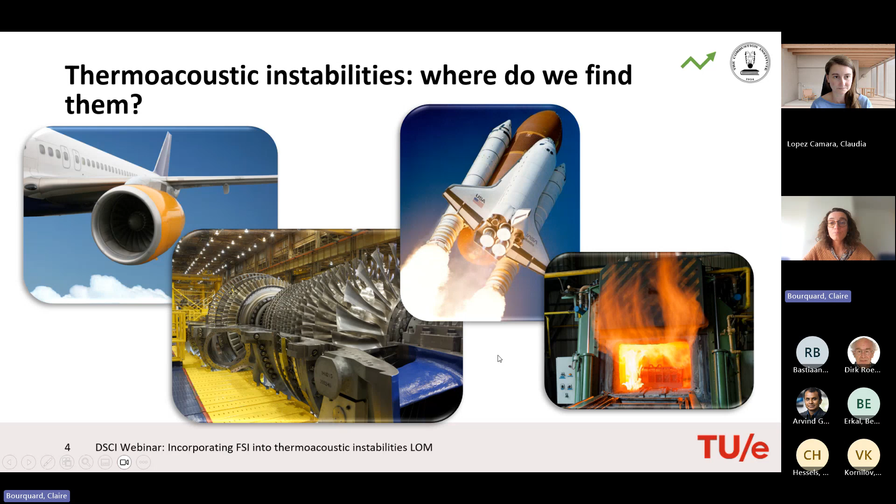So what are they? As a simplified explanation of what happens in a combustor where you have thermoacoustic instability: you've got a coupling between an acoustic mode of your system, typically between the fuel and air injection, where you would have choked conditions, which act as a hard acoustic boundary condition. Then within the whole volume of your combustion chamber, you can have acoustic modes that are the eigenmodes of your combustion chamber. And then in some cases it happens that the flame, specifically the heat release rate of the flame, is synchronized to the acoustics.

And this is measured by the Rayleigh criterion. It's a criterion where you integrate over one period of your typical acoustic quantity the unsteady pressure and the unsteady heat release rate. And of course, if the integration over one period of this quantity is positive, this means you have energy added to the system, and this is when you can reach instability. So the amplitude would keep growing and growing until some nonlinear mechanism makes it reach a limit cycle.

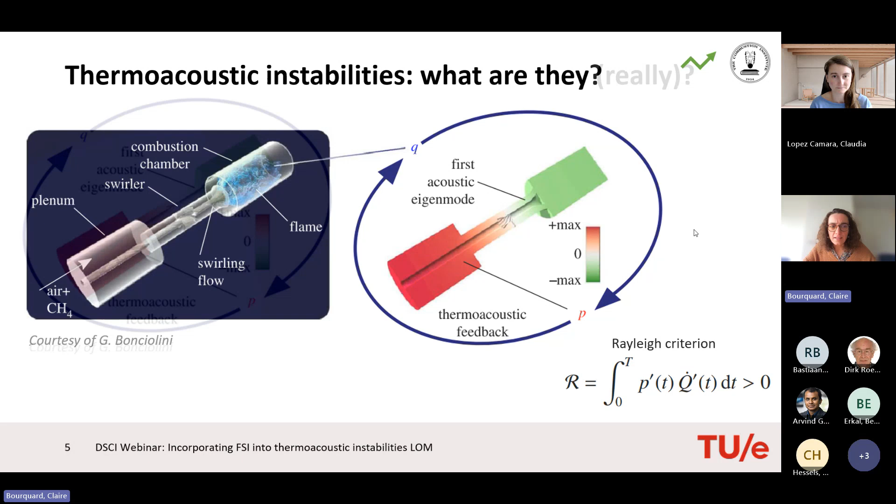But we're going to go a bit more into that. Okay, so this is a very simplistic view—you just have the acoustic eigenmode and the flame. We're not going to go deeper into the modeling today, but I just want to make you aware that there are models that take a lot more physics into account. I think usually it's quite scary to show this graph from Wolfgang Polifke in Munich, which shows you basically everything that can come into play when you're looking at thermoacoustic instability.

So we're doing a very much simplified version today. But as you can see, you could also take into account entropy waves, some coherent flow structures, some coherent flame structures as well. So there's a lot more to it, but I'm just focusing on a very simple modeling—just so that you are aware this is a much more complicated problem.

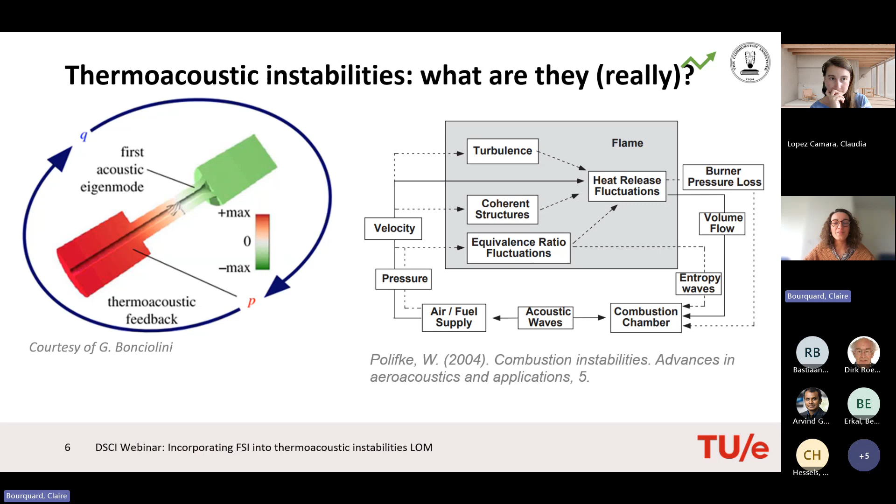Okay, so what are the consequences? When you have thermoacoustic instability, your amplitude typically can rise very high. This depends on the conditions of your combustor, typically the equivalence ratio and the fuel mass.

This is an example from a colleague of mine from the PhD, where you can see that on this equivalence ratio versus natural gas mass flow map, you have some places where the RMS pressure measured by some microphones is quite low. In that case, you have no clear dominant peak in your frequency response. Of course, you still have some frequencies that dominate if you zoom in on the responses, but the amplitude of your pressure fluctuations stays close to zero, and the distribution has this shape with a very sharp slope close to zero, and then an inflection point after the peak.

In some other cases, typically when we go more lean and add more air to the system, we can reach a case where the pressure fluctuations get very high. The typical diagnostics tool to determine if you have an instability is a very clear resonance peak in the frequency response, knowing however that this is not sufficient. You could have a system that is resonant and excited by something else at one of its resonance frequencies, giving a very high peak in the frequency response, which doesn't necessarily mean you have an instability. But in that case, the amplitude is way higher.

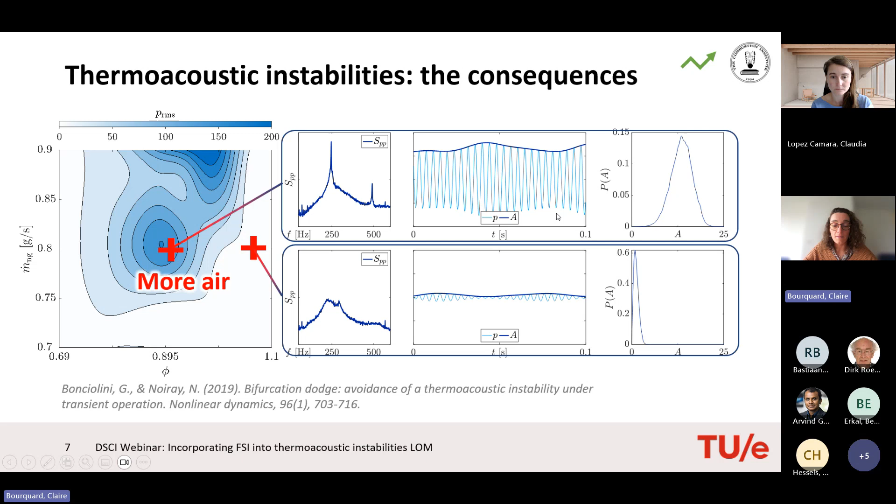So in terms of consequences, you might ask, okay, the acoustic pressure is high, do we actually care? The answer is yes, of course. Maybe some of you have seen some of those horror pictures - this is from liquid fuel rocket engines, some pictures from NASA of catastrophic explosion or flame flashback that led to melting of some injectors or total deformation of the injectors as well.

For gas turbines, we also have the equivalent. Typically the main danger is that your flame, instead of sitting in the combustion chamber where you had planned it, is either blown off or moved upstream by the pressure waves. In that case, you heat up pieces that were never designed for those high temperatures, and this is what happens here with everything damaged by high temperatures.

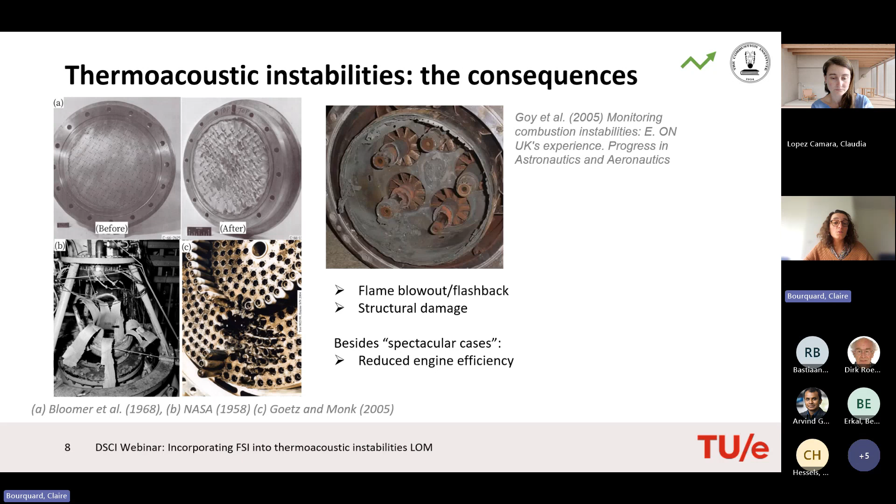Those are some of the dangers: flame blowout and flashback, leading to structural damage as well, as you can see on most of those pictures. But we always tend to mention a bit too much those spectacular cases. Even at moderate amplitudes, you still want to get rid of them, because besides those spectacular cases, the consequences of thermoacoustic instabilities are also reduced engine efficiency and increased emissions. So you do want to get rid of them, not only in the extreme cases.

There's also a slight shift of paradigm, I think across the whole combustion research community, where progressively we're switching combustion fuel from methane and natural gas to hydrogen, or at least trying to increase the hydrogen content, for ecological reasons obviously. This doesn't necessarily mean it's more unstable or more stable, it really depends on the case. But in any case, hydrogen has very different combustion dynamics, so there's a lot of leverage at the moment to improve the modeling of thermoacoustic instabilities, especially for H2, because the dynamics are quite different.

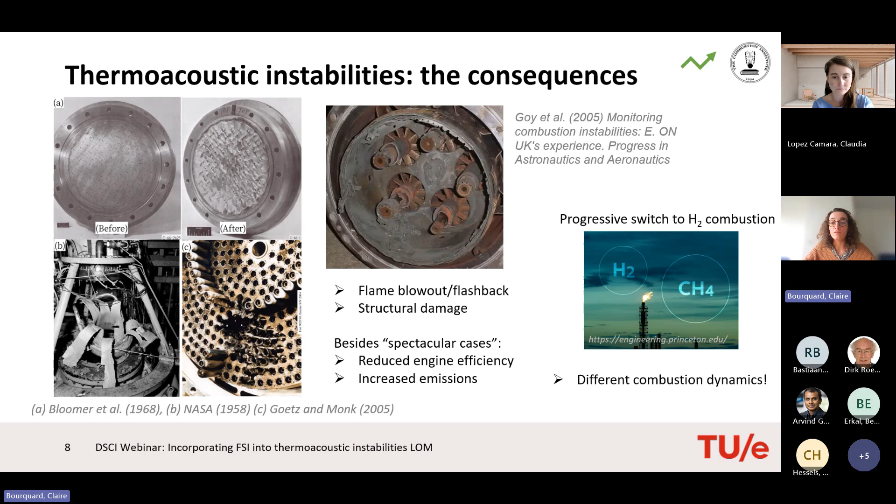Okay, so now a bit more on the low order modeling of those instabilities. Going back to my simplistic view: we typically have a first acoustic mode and the heat release of the flame sitting somewhere here, which couple to give this thermoacoustic instability. The simplest way to model this is to do a Galerkin expansion on the pressure in the combustion chamber, modeling it as the sum of terms relating to the different acoustic modes.

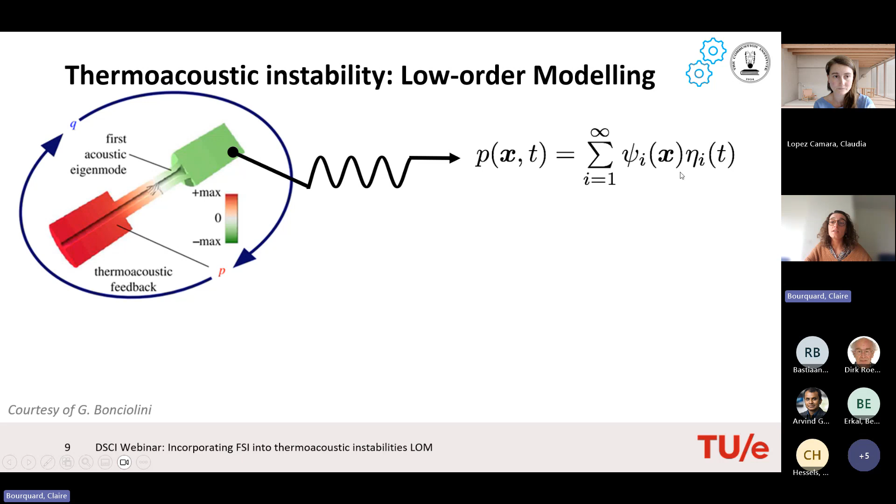Typically in that case, psi-i would be the mode shapes of the various modes, and eta-i is the time-dependent amplitude of this mode. Then in this frequency response, you have the response of multiple modes at the same time.

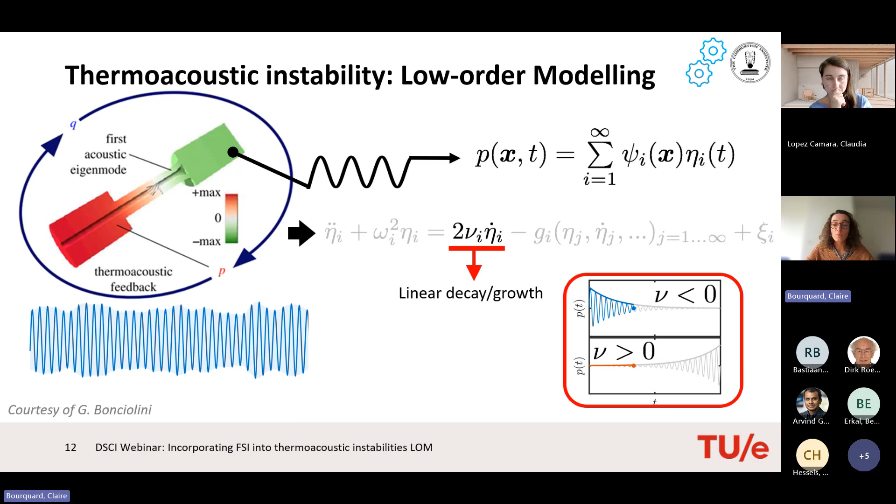Then the other source term here would be the flame nonlinear response and the modes coupling. So this is what gives you the actual dynamics, the steady state dynamics of your system.

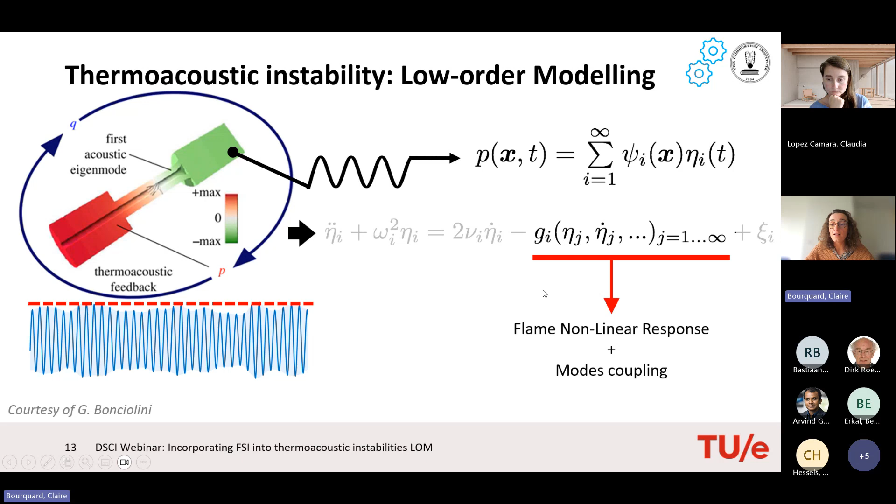And then last but not least, as an effect of the flow turbulence, we add a random amplitude, which is this noise source term. In the present case, we're going to use white noise. There are some studies where they also use colored noise to take into account the fact that the turbulence spectrum has more frequency content in the low frequency compared to high frequency, but this is not something we're going to cover today.

Okay, and then the last ingredient for today - so as you saw in the first slide, we were talking about the fluid structure interaction. What if the boundary conditions were not rigid? Because in all the previous modeling that I have shown you, we just assume our usual wall boundary conditions, meaning that the walls are rigid, and that besides heat losses, which are included in the linear term of our forcing, we assume that the walls would have no influence whatsoever on the dynamics.

So in that case, we just have the flame reacting to the acoustic mode, as you saw before. And then, what we want to ask ourselves today is, what if some part of the wall is actually compliant and can be excited by the flow and vibrate? And what would be then the influence of a flexible wall boundary condition on the thermoacoustic dynamics? So that is the main question for today. And also, how do we incorporate that in the low order modeling that I have just shown you?

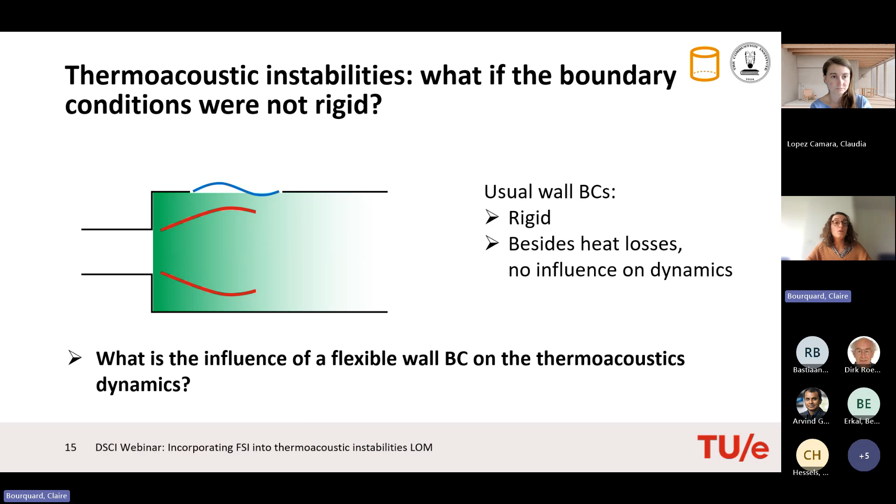Okay, so we're going to use some practical data for this. I'm going to introduce you to the DynAF combustor that sits in Enschede at the University of Twente. I think we even have Berksu Erkal, who's joining today. So if you have questions on the setup, I think he can answer all of them, hopefully.

Okay, so this is what happens in this combustor. We have a cyclone here at the bottom through which the air comes and is swirled, and then the fuel injection is done right at the end here. And then all of that is injected here at the bottom of the combustion chamber, which also comes here. And this is where the flame sits, as you can see from this imaging here.

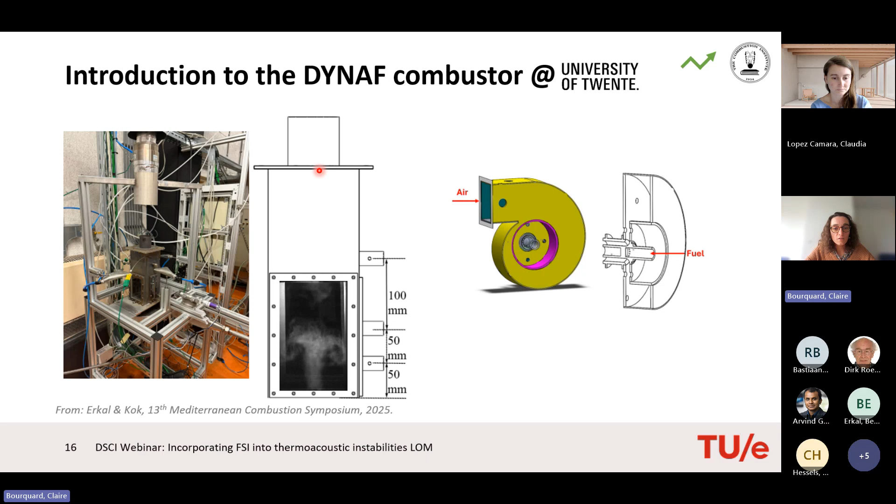And then the combustion chamber is around 300 millimeters length, or 250, and we have pressure sensors located on the side. So what happens with this combustor is that it is stable when no hydrogen is added to the mixture, so when it's just running on pure methane. But the acoustic pressure is increasing tremendously when we add hydrogen to the mixture.

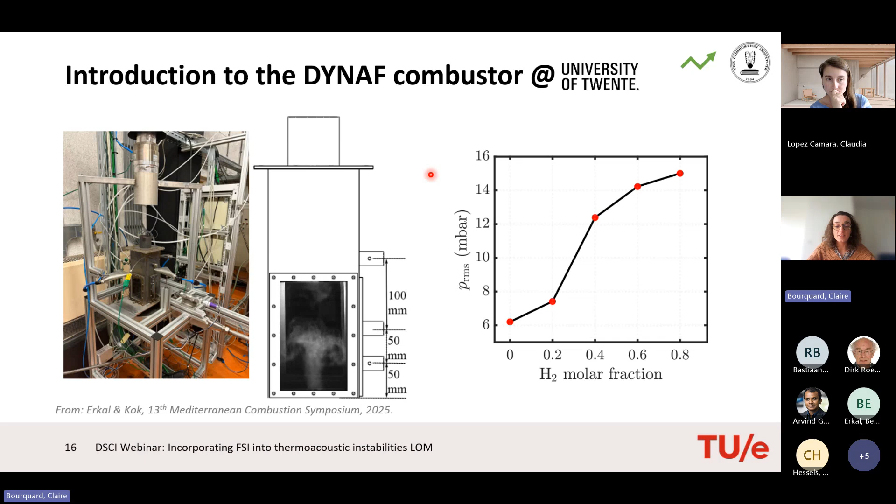So we're going to look mostly at this case, the case where the molar fraction of hydrogen is 0.8, because this is the point where we have the biggest instability. So that's what we're most interested in.

Okay, so in that case, the window that we had before, through which we could look at the flame, we actually replace it by a steel plate of 5 millimeter thickness. The reason why we're doing that is we assume this plate is perfectly rigid.

Which is what we want, right? In this baseline case, we do not want yet to look at what happens if the walls are compliant. However, we do want the temperature boundary conditions to stay the same, because if we have different heat losses from a quartz window instead of a steel plate, we might have very different flame dynamics. Then what we're measuring is not actually the influence of just adding a compliant wall, but also of modifying the thermal boundary conditions of the flame, which is not what we want to look at.

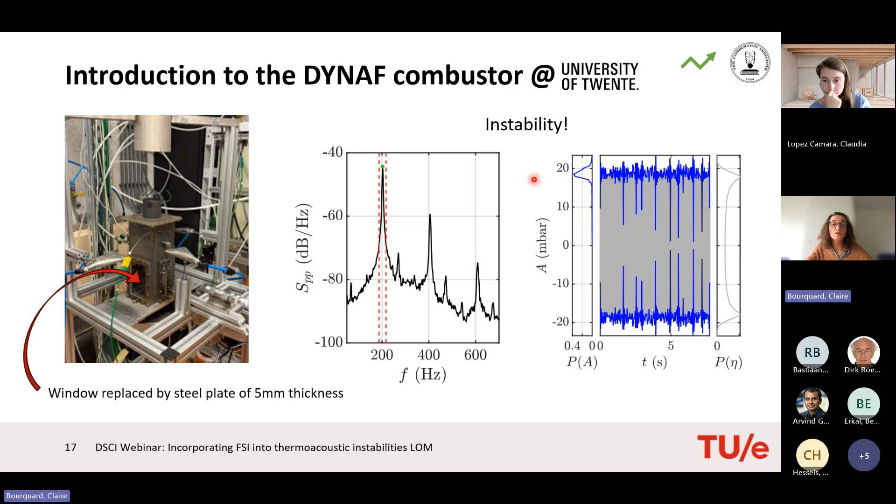And when we look at the statistics, here in the middle you can see just the time trace of the pressure. Then we look at the statistics of the amplitude, so the histogram of the amplitude of the pressure and of the envelope of our pressure signal. This is what you see here. As I mentioned before, the envelope is what we will use to perform our low order modeling.

So this is what we're doing now, back to a slightly modified version of what I showed you before. We still have our oscillator equation part here on the left, and then our source terms, and then our noise excitation, white noise excitation here.

In this case, we model the source terms as follows. We add the damping of our system here in the source terms, so alpha is the damping. In this damping, you already have included basically heat losses that you would have, any dissipation you would have in the acoustic boundary layers on the walls of your chamber, losses that you might have from the flow structures, etc. So it's really an aggregate term for all different kinds of damping mechanisms that you might have in your system.

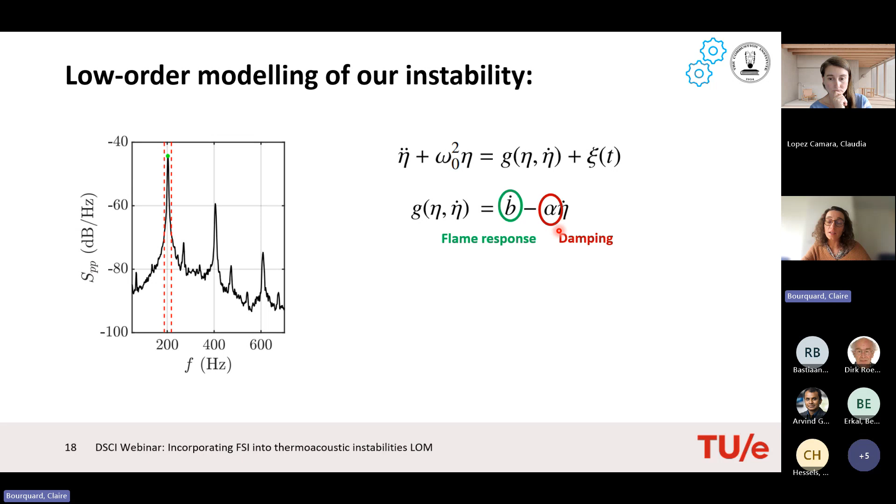And then in this term we also have the flame response, and I'm going to spend one slide on that as well. The flame response, obviously, we need to approximate it depending on the amplitude. Usually the way people do it is to use this third order Taylor expansion, because usually the flame response is symmetrical, meaning we don't have a term of order 2 here.

So we have the linear flame response here, which then with beta added, beta minus alpha would be our linear growth rate, which I showed you before. And then this term is the nonlinear saturation mechanism. This is what allows your instability to develop, to grow exponentially up until a certain point where it starts saturating, and this is how you stabilize your amplitude on a stable limit cycle of a certain amplitude, which might be very high, so you want to avoid it, right?

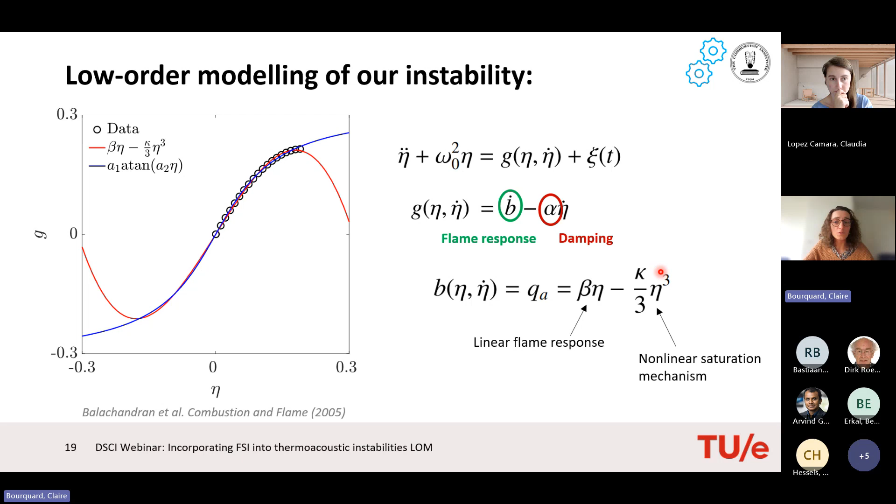Okay, so this is about the flame modeling, and then plugging those terms in here, we arrive at this equation where we have again our oscillator part, our linear growth rate, which is, as I mentioned, beta being the linear response of the flame, alpha being the linear damping of the system, and then the nonlinear response of the flame here, and as before, our white noise excitation.

So you might say, okay, this is some nice modeling, but you have a lot of parameters that you need to identify. How do you do that? The way to do it is actually to assume that your instantaneous amplitude of the acoustic mode you're looking at is of this form.

So that you have a slow varying envelope of your signal, and then the oscillating part with also a slow, relative to the oscillation, slow varying phase.

And then by looking at the dynamics only of those slow varying parameters, the amplitude of the envelope and the phase, you can get to the Langevin equations which govern those slow fluctuations. So now I've only written the one for the amplitude, because this is the one we use to identify the system parameters. The phase we're not really looking at this moment.

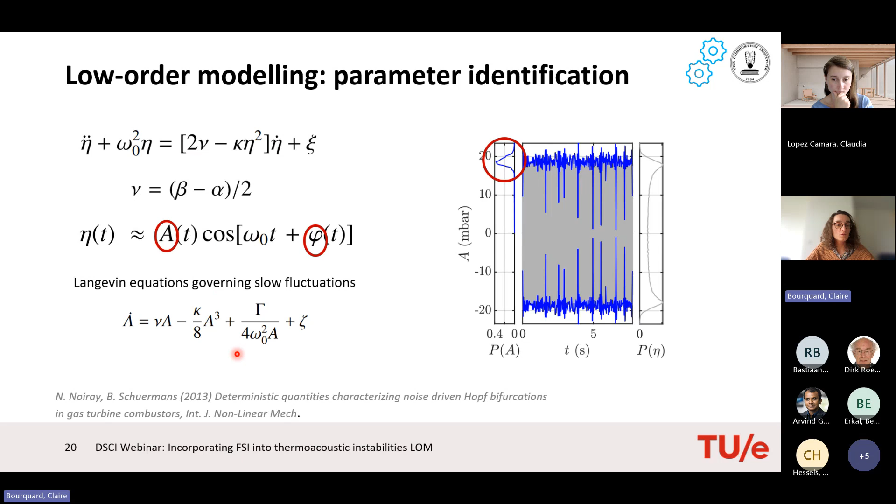Yes, and so in that case, to identify, the dynamics of the envelope of A are what we use to determine nu, kappa, and gamma, which is the noise intensity.

In our case, I've only shown you when we have a very sharp peak. When we zoom in on the peak I showed you before, it actually shows that there's a main instability at 203 hertz, more or less, but there's also influence of at least one neighboring frequency, because our peak definitely does not have a nice shape where we can just fit one oscillator equation and be happy with it. So we have to be a bit more creative here.

What we came up with was to use a coupled system of two oscillator equations, two of them being unstable modes. In that case, the beta and kappa, which are the flame response, are the same in all the equations - that makes sense, right, since it's the same flame for both of them. But for each mode, what varies is alpha, the damping of each term, and omega I, the oscillation frequency. We also added an ingredient, a time delay between the modes, which allows us to reproduce the dynamics better.

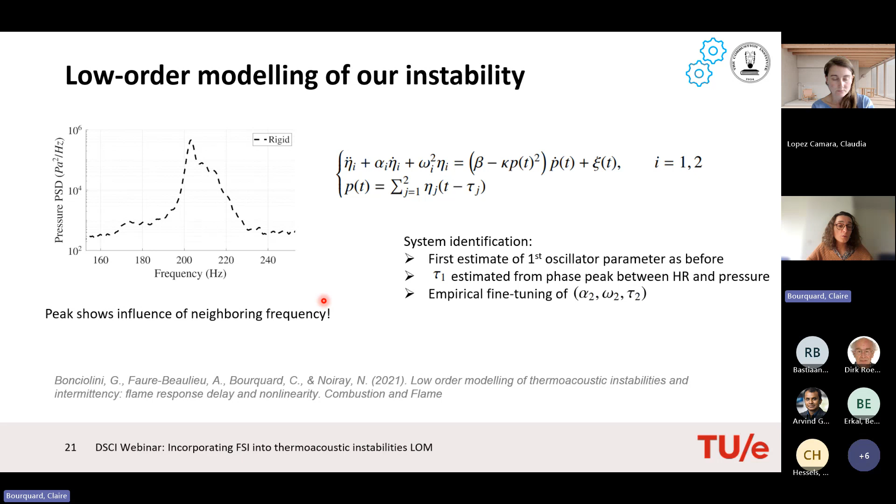So for the system identification, we have to be a bit creative there. It's a two-step process. First we estimate the parameters of the first oscillator as we did before, assuming that this bump here does not exist and that it would be a perfectly sharp peak. Then we estimate tau1, the delay related to the first mode, estimated from the phase between the heat release and the pressure, which we can measure. And then we do some empirical fine-tuning of the parameters for the second mode to reproduce the dynamics. I'll show you later that this works quite well.

Okay, so now we go again to the introduction of the experimental setup for when we add the flexible plates. In this case, we replaced before with a plate that was 5 millimeters thick, but we can add other plates. And then we have our 3 pressure sensors that I introduced before. There's actually another pressure sensor, before the entrance to the cyclone.

We are able to measure the vibration in the center of the plate through a laser Doppler vibrometer system - you can see the little green dot here in the middle, hopefully. We also measure the heat release rate through photomultiplier measurements on the other side, where we have a quartz window. So we only change the thermal boundary conditions on this side by adding the steel plates.

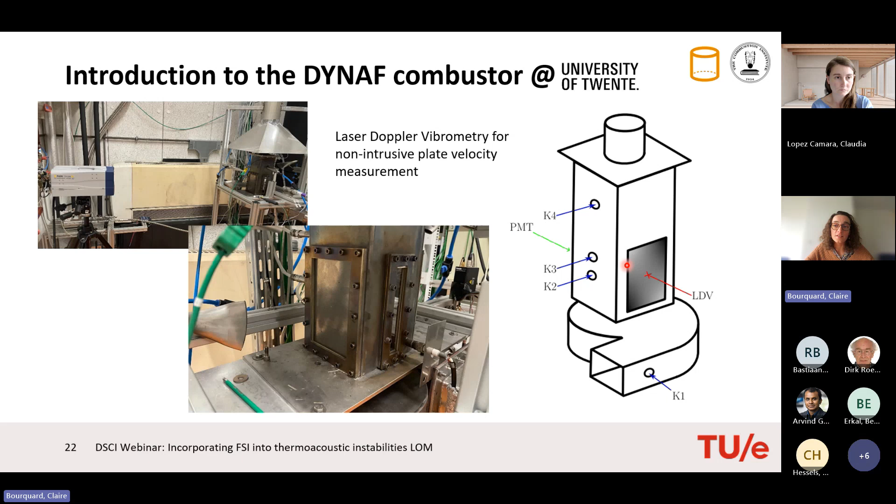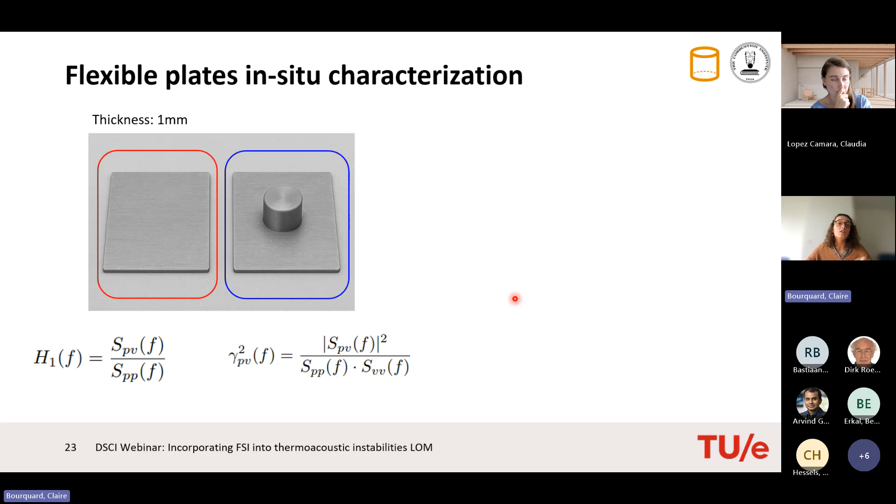Okay, now introducing the plates that we will use in the system to see what happens when the boundary conditions are compliant. Both of them have a thickness of 1 millimeter, and to characterize them, we wanted to characterize them not separately from the combustor, because the fact that they are at high temperature and might also not have a uniform temperature across the plate might be relevant to the response of the plates, right?

So what we decided to do is measure the transfer function between the vibration we get from the center of the plate and the pressure sensor at the same location, let's say the same longitudinal location on our combustor. At the low frequencies we're looking at, we assume we only have plane wave propagation in our system, so it's reasonable to assume that the pressure sensor, even if not exactly at the plate, can measure accurately the pressure there.

So this is what we get: the left plate is just a simple plate of 1 millimeter thickness. You can see that the highest response we get is around the first resonance frequency of this plate, around 540 hertz, more or less. Then we tried a different plate with an added mass, because we wanted a plate with the same level of compliance but a resonance frequency closer to our instability. So it has a resonance frequency around maybe 190 hertz or something like this.

Also on the validity of those measurements, you might say, okay, but you did those measurements while you had the instability. It is also true that the response of the plate might not be the linear response, because we know that for base excitation, ideally we would want to have excited those plates with white noise - a pressure fluctuation with the same frequency content, or the same amplitude, over the whole frequency range. However, we excited it with basically the pressure distribution I showed you before, the one of the instability.

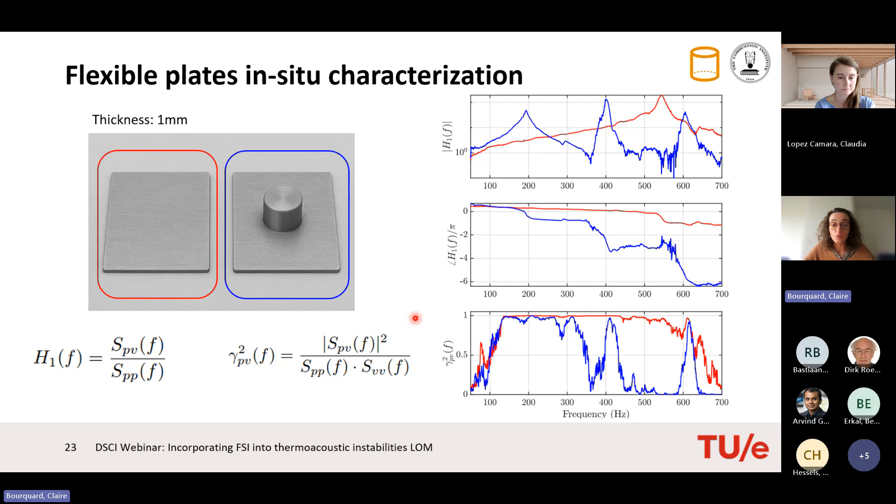However, when we look at the results, we have a very high coherence, which we would also get if we have too high excitation in this range. But we can also see that the plate response follows basically what you would expect from a damped harmonic oscillator. This is how we infer that the way we do the plate in situ characterization makes sense, because the result looks sound, even though we excite the plate more around this frequency range than others. This is also a proof that probably the nonlinear mechanism that would go into the plate vibrations would only be triggered at very high pressure amplitude, and we're nowhere near those amplitudes. That is reassuring for the validity of our modeling later.

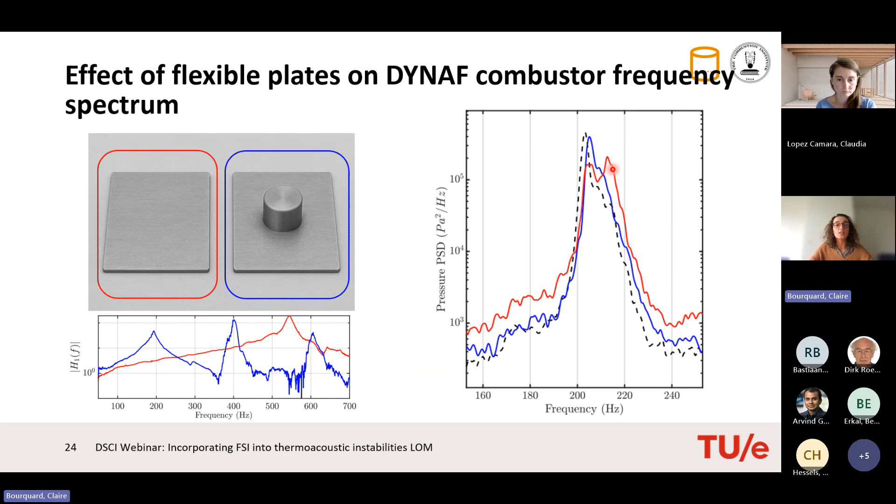We wanted to check what the mode shapes are in both cases, because we thought maybe the plate influences the mode shape rather than some dissipation mechanism that damps one mode or favors another. So this is what we checked. We take K2, the pressure sensor at the same longitudinal location as the center of the plate, which is also where we measure vibration velocity, as our reference sensor. Then for each frequency we look at the phase between this sensor and the three other sensors: K1, before the cyclone, and K3 and K4. We look at that close to the frequency of both our modes, which are the two vertical lines here.

As you can see, the black curve is without plates, the blue one is the plate with low resonance frequency, and the red one is the plate with high resonance frequency. Upstream, there's not much change, which we also probably did not expect. We do have a slightly lower phase between K3 and K2 and between K4 and K2, in the combustion chamber, so there is a slight modification of the acoustic mode shape by introducing the plate. However, it's almost exactly the same between the plate with high resonance frequency and the plate with low resonance frequency, so this does not seem to be impacted by the resonance frequency of the plate. We can basically rule out that it's an acoustic mode shape modification that changes the dynamics of our system, because both plates lead to a very similar acoustic mode shape but very different dynamics. So we know this is not the case.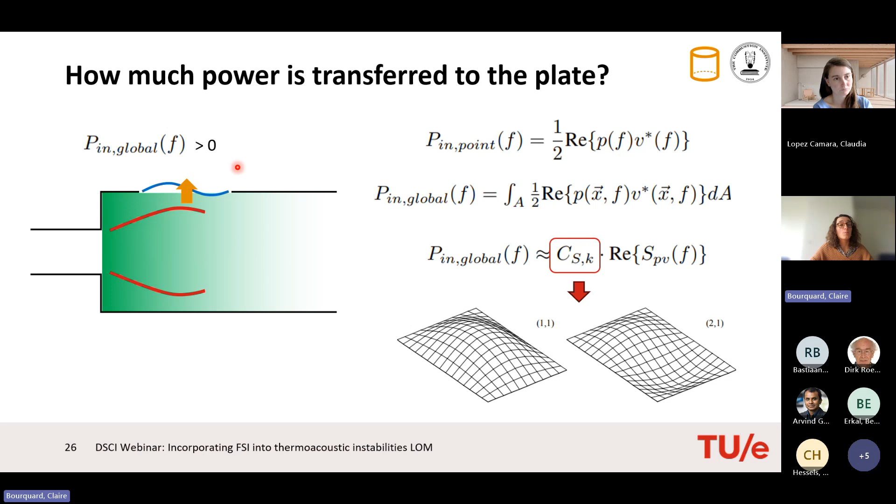When we make this calculation, if the transferred global power is negative, this would mean that the plate transfers power to the system. So in a way, this describes a constructive interaction between the plate and the dynamics of your combustion chamber. In the other case, if the total power is positive, this means the plate absorbs power from your system and stabilizes it. So these are the results for both plates.

In black, you can see the frequency response that you're used to, that you saw before. In blue, this is the frequency response of the plate with the low resonance frequency, which as you remember was almost the same as the one without a plate. In red, you have the frequency response of the whole system with the plate with the high resonance frequency, where you can see there is a decrease in the main mode and an increase in the neighboring mode. In pink, you can see the amount of power that we calculated is transferred to the plate.

You can also see that when we have a high acoustic amplitude, this is when we transfer the most energy to the plate, which makes total sense, right? The background is colored as a function not only of the amplitude of the power, but also whether it is positive or negative.

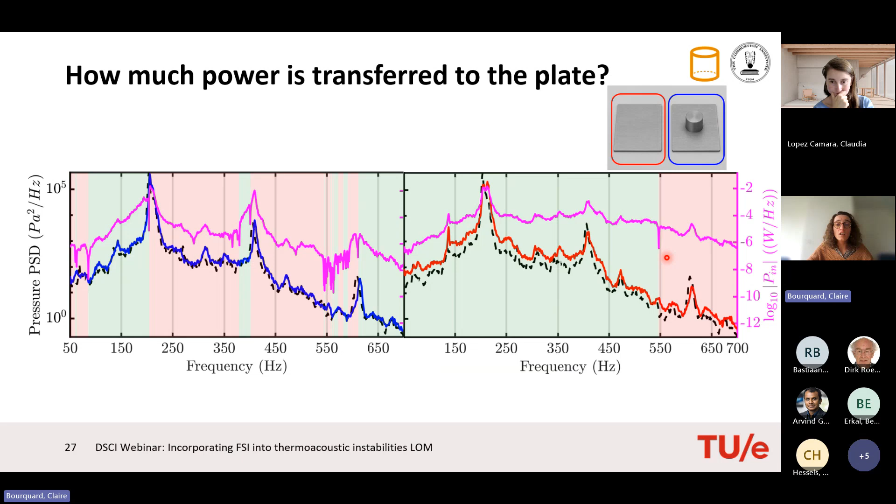So what you can see is that before the occurrence of the first plate mode, you are systematically dissipating energy, absorbing energy — let's say the plate is absorbing energy from the system. But after the first mode, this is not guaranteed anymore. In the case of the flexible plate with the highest resonance frequency, since the first mode of the plate is somewhere here, we are absorbing energy from the system over this whole frequency range.

Now we want to see how do we model the plate to add it to our low order modeling that we saw before, right? So the first option would actually be to use an additional harmonic oscillator for the plate — something we would be able to do, fitting basically the plate response with a simple oscillator equation like this.

So fitting omega, the frequency of the first mode, and gamma, the mode damping, to this plate frequency response that we calculated before, feeding it with the pressure, and then adding to our system of coupled equations a source term which would come from the volume variation in the combustion chamber that results from the displacement of the plate.

We actually ruled out using this modeling because in that case, we would have expected the plate with low resonance frequency to have way more influence on the system dynamics, which was not the case. If we added this harmonic oscillator with an eigenvalue really close to the current eigenvalues of our system, we would have a tremendous effect on it, but not if the eigenvalue is far from it — which is not what we saw.

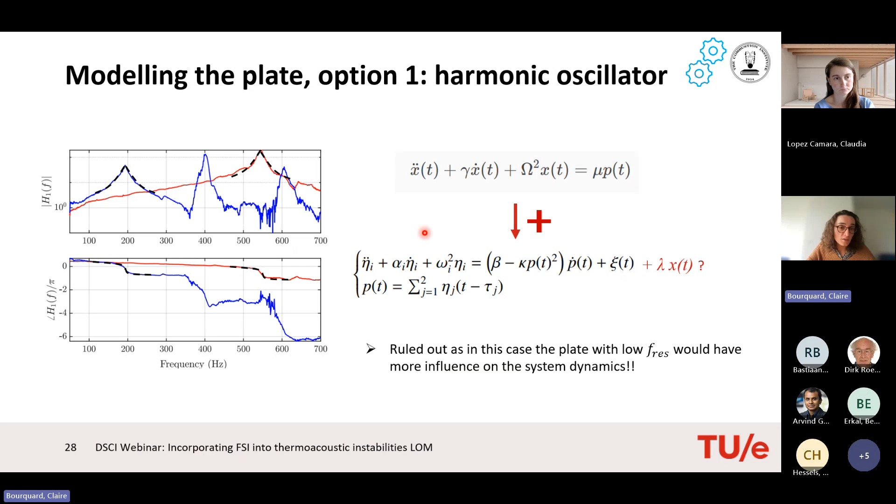So the second option is to increase the damping of some of the modes, and this is what we did here. Let me show you — the black and purple crosses here are the eigenvalues that were linked to our system before we added the plate effect.

To model the plate effect, what we add here is that we decrease the growth rate of our main mode by an amount of damping that we fit to the dynamics here, which represents the added damping of the plate vibration. As I mentioned before, since in the damping of our system we also had included whatever dissipation happens at the walls, in the acoustic boundary conditions, it's not such a far-fetched hypothesis to assume that the vibration of the plate just increases the dissipation at the wall and results in higher damping overall.

With the new eigenvalues, which would be the green one here and the purple one here, we are able to nicely reproduce the frequency response here. What I want to show you now is also a comparison with and without the plate.

So maybe I need to go back to explain what's happening on those plots. In the model, we have two oscillator equations, and for each of those modes, we can calculate the amplitude and check the amplitude of both modes separately. In the experiments, however, we have only one pressure time trace, so we would not know when we are at which mode.

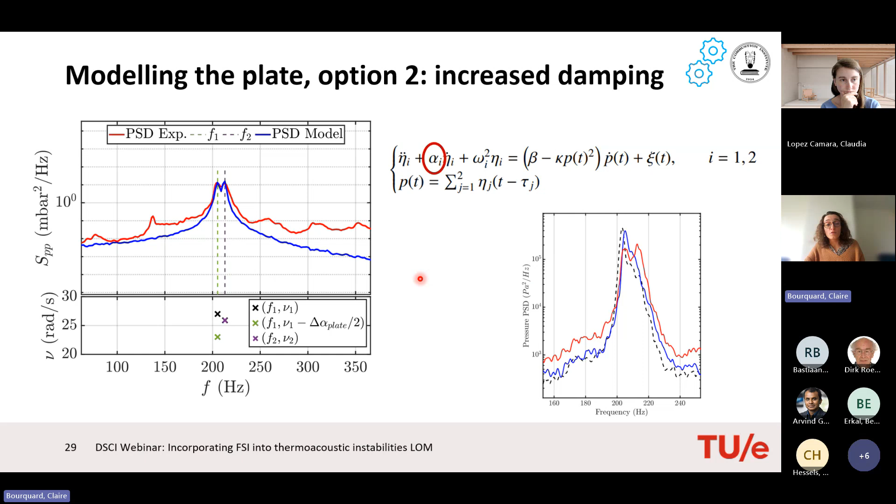This is what I'm showing you here. Without the plate, we have the amplitude of the first mode, the one at 203 hertz, which is very high, and the amplitude distribution over the second mode is quite low. So sometimes we have some incursion where the pressure goes to the second mode, but most of the time the oscillations happen at 203 hertz. We are able to reproduce this nicely with our system.

That's the system identification I showed some slides ago, where we first estimated the terms for the first mode and then adjusted the terms of the second mode so that it would match this probability distribution. Once we model this, we can then look at the separate two amplitudes.

This is what we also see here: for the first mode, most of the time this is our pressure time trace, and the modes are mutually exclusive - either we're at one frequency or the other - and this is what we see in the experiments too. If we look at the statistics of the time instances where the pressure is here, those correspond to specific, quite lengthy intervals, and then some other intervals you are around here, but we can really separate when we are in the first mode and when we are in the second mode.

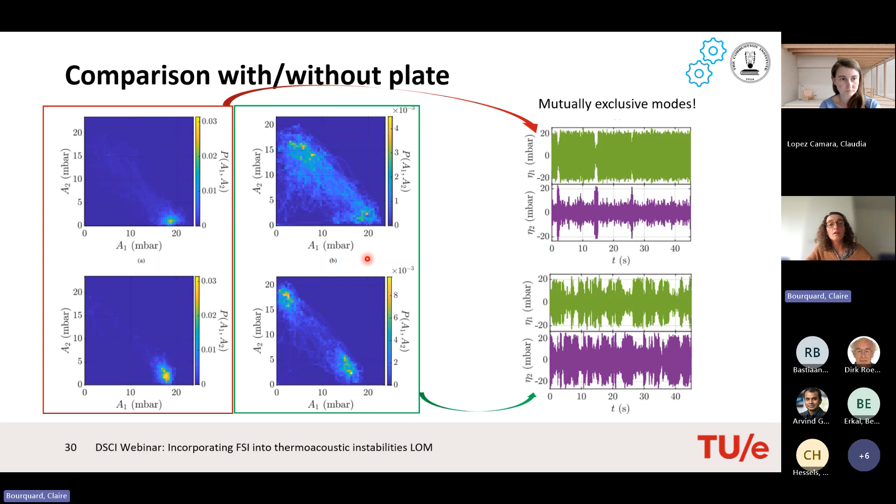Then once we add our additional damping from the plate, this is what we get from the model - quite nice intermittency between the two modes, where it's way less obvious which one is dominant. So we really have modal competition between the two modes thanks to additional damping of the plate. We can see this is also quite in line with what happens experimentally. Again, this was generated by filtering around the two modes and making the statistics of those filtered amplitudes.

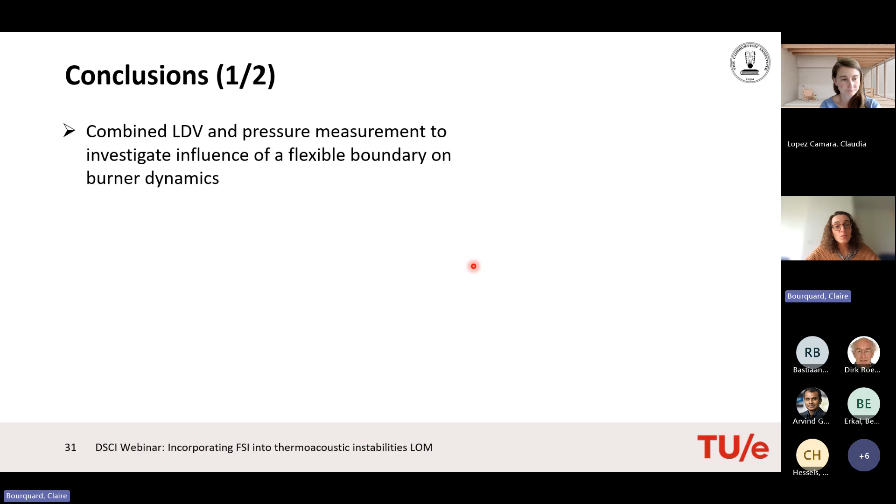Okay, coming up to my conclusions. We combined laser Doppler vibrometry and pressure measurements to investigate the influence of a flexible boundary on burner dynamics. A bit counterintuitively to what we expected, it's not the plate with the resonance frequency closest to the thermoacoustic mode that had the greatest influence on it. We're actually quite surprised how little influence the other flexible plate had.

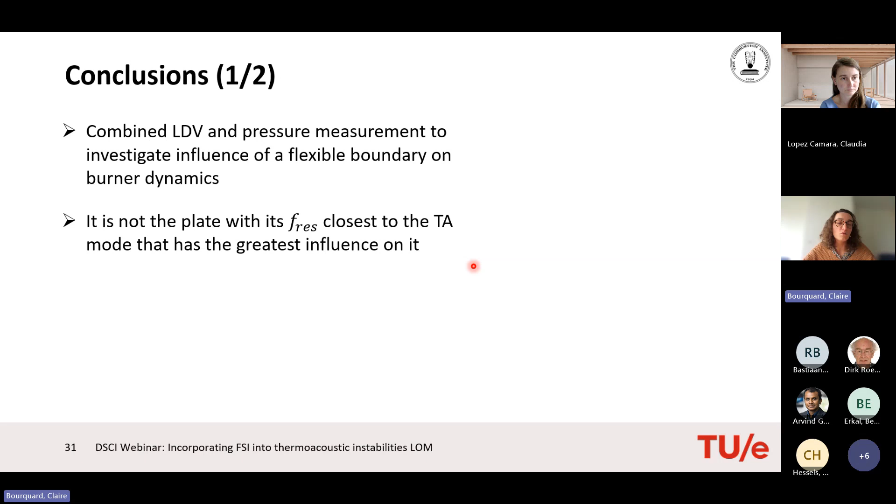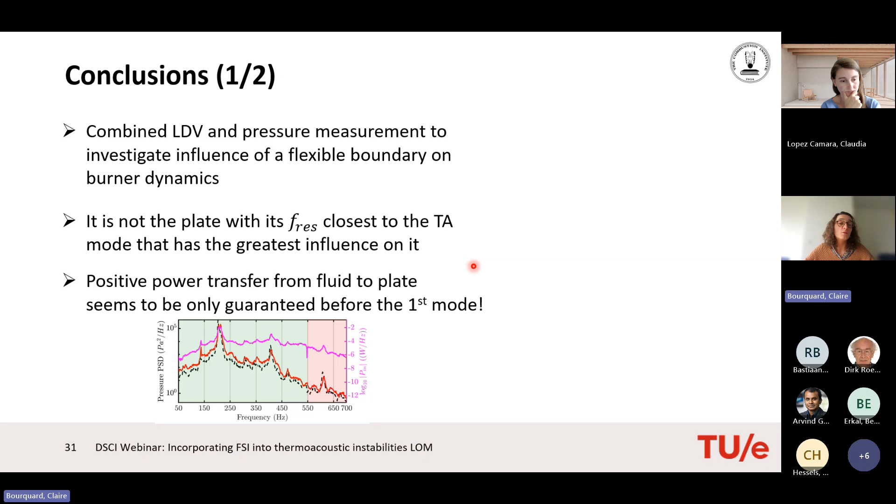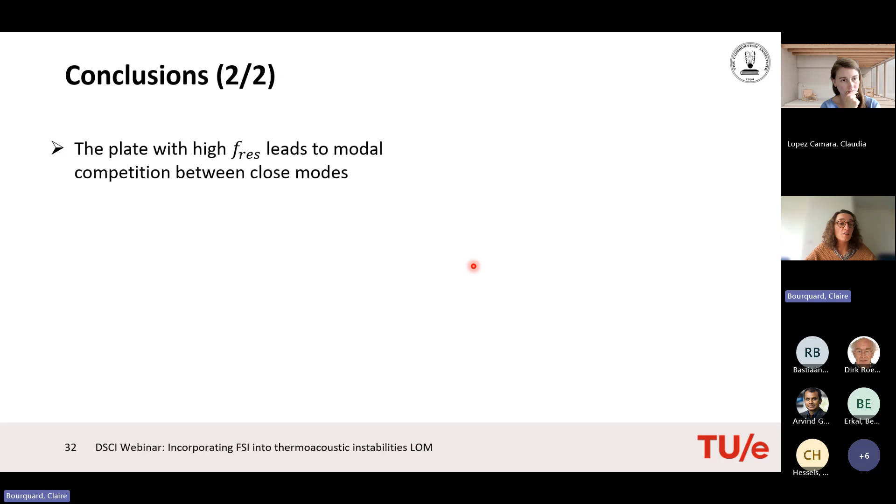We can also conclude from our power analysis that positive power transfer from the fluid to the plate seems to be only guaranteed before the first mode. On the modeling side - still on the physical side - the plate with higher resonance frequency leads to modal competition between the modes that are close. It seems the best lower order modeling strategy is to increase the damping of the most unstable mode, at least in our case.

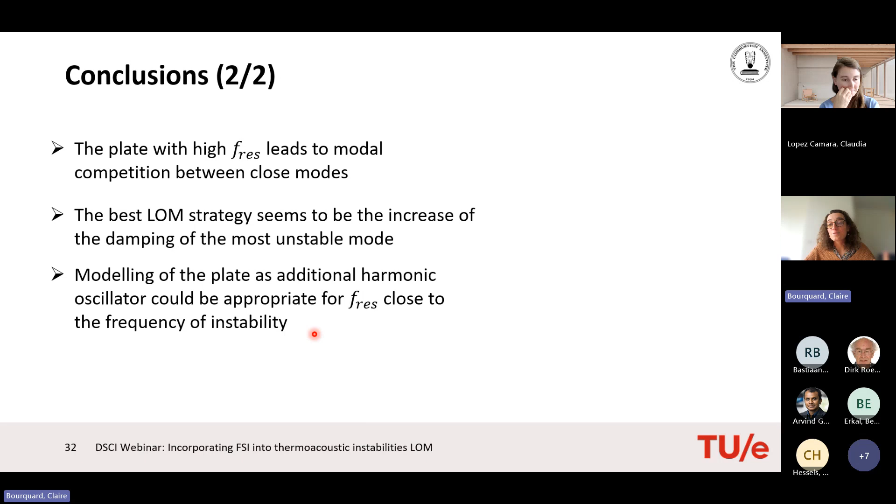However, if there are cases where the plate would have a high influence with a resonance frequency close to the frequency of instability, we suspect that modeling the plate as an additional harmonic oscillator could be appropriate. And last but not least, on a lighter note, the added mass on the second flexible plate sadly left us after two days of good service during the experimental campaign. So, in loving memory of the plate with added mass.